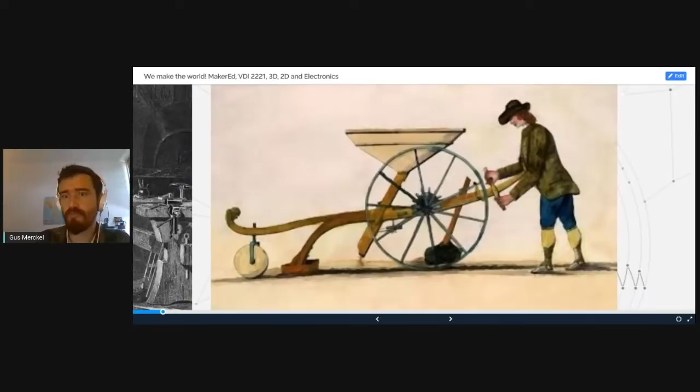This revolutionized the way we used to do farming and created a second revolution, because now we had machines. Now we needed fewer people working in the farms. Then a lot of people were thinking about other stuff, and that led in the end to the industrial revolution. So it's important to see this connection. In the maker world, we see the development of science and technology not as a thing that goes alone. It always goes together with communication and social changes.

When people started going to the centralized factories, in this picture we see a factory in London, in England. When people started migrating to the cities, it wasn't only because we invented the steam machine, it was also because the way society looked was changing. Now, at this point in history, we have a new type of society where we have 99% of the people working in a factory and 1% of the people owning the machines.

So this model is still present. The only thing that changed is that now the machines are not in Europe. Can you write in the chat, where are all the machines today? Where is the industry centralized today? Where do you see the machines today? You can write it in the chat.

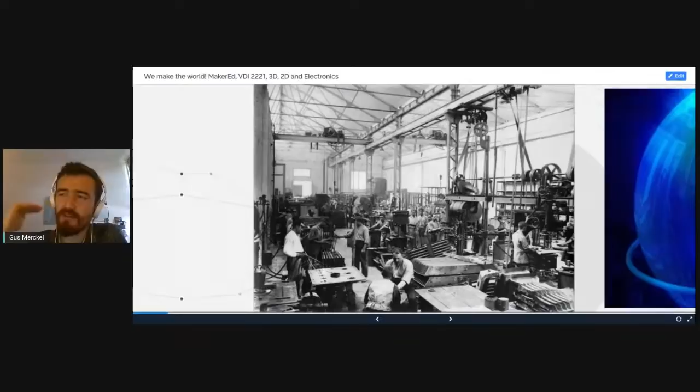Today, almost all the factories are in Asia, right? Taiwan, China especially, exactly. Yes, everywhere, but more centralized in Asia. So if you see, we've been living under the same social and industrial scheme for over 100 years. But 20 years ago, something happened. The internet came along. A lot of historians call the invention of the internet the second Gutenberg. What do they mean by the second Gutenberg?

Well, they mean that the process that Gutenberg started, going from a society without access to knowledge to a society that could get access through books, was happening again. Another democratization of knowledge. This particular aspect changed our life completely. Why? Well, it's easy. Now, you didn't have to wait. Let's say someone in Spain writes a book about chemistry. They have to print the book, put it on a ship or on a plane, and I have to wait. If I'm lucky, maybe 2 days, or if it's by ship, maybe some weeks. I have to wait 3 weeks till the books come.

It's possible that in that period of time, the discoveries written about in the chemistry book are outdated. Today, I write something here on my computer, I click enter, and the knowledge is available everywhere, or almost everywhere. So you see, there's a second democratization. Now the question is, if the first Gutenberg led to the agricultural revolution and the industrial revolution, what will happen with the internet?

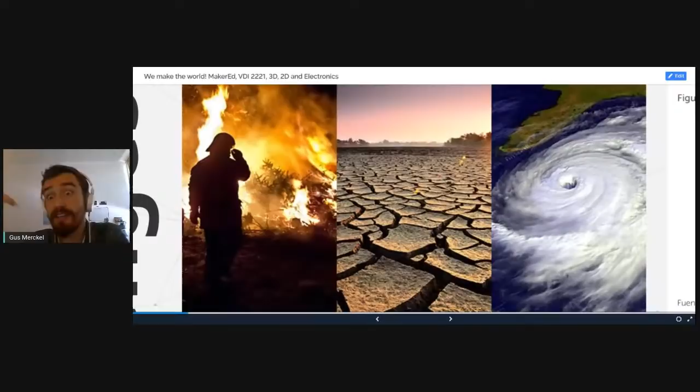For one, the environmental challenge. We are seeing climate change, and it's changing it all. We saw the fires in Australia a couple months ago. We are seeing the droughts in California, we're seeing more and more hurricanes of never before seen strength. So the problem of climate change is also a product of the way we've been managing industry consumption. So that's one of the big challenges we face.

We have also a very big challenge, and that's the low interest in STEM subjects in developing countries. Here we see the distribution in percent of people that study science in the year 2016 in Mexico. And you see that only 4.75% of the students are going to science. As you know, STEM stands for science, technology, engineering, and math. And we see every year that a lot of people decide another subject than choosing sciences.

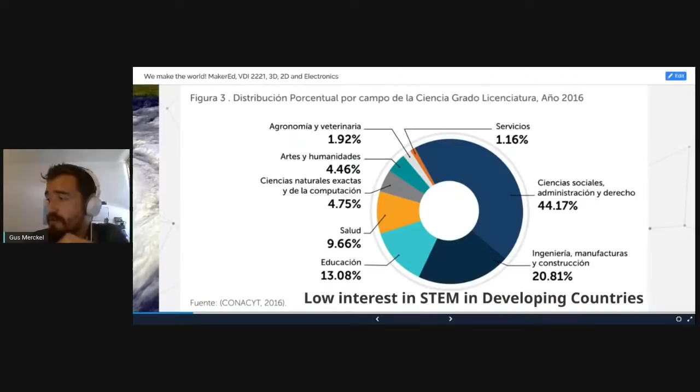I mean, in Mexico, we still have 20.81% of students choosing engineering, construction, and manufacturing. But again, 4.75% in science and computing is very low. And we need a lot of people choosing these subjects. Another problem is what I'm going to show you in this video. So please pay attention and tell me what you saw on that video.

I'm seeing some comments about the statistic. Yeah, you're right. It's not updated. We have to update it. I have more recent numbers, and they're still really low. I can give you the exact number. Write about why you think that a lot of people are not getting interested in STEM subjects. We can discuss that further.

So about the video that you just saw. So what are you seeing? Yeah, machines are replacing humans. Yes, that's one. In some cases, we can be replaced by robots. Yes, the machines substitute the people's work. This video is from Kurzgesagt. It's a really cool channel on YouTube. It's really interesting. What I like is this idea about fighting a job race against robots.

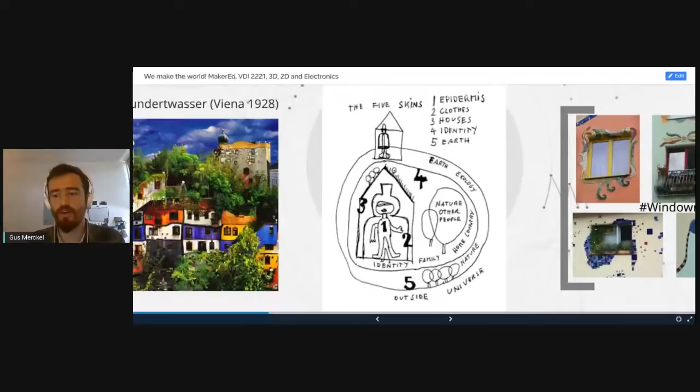And a little bit of what he's doing is this. One of his projects was called the window right, or the Fensterrecht. The idea: you've seen those Infonavits, right? You maybe live in one of those Infonavits. I live in a very tall building, and all the windows in this building look the same. So for Hundertwasser, we had the right to decorate our window, and he said every human being has the right to say a human lives here.

Sometimes technology is tricky. They're trying to optimize and make everything faster, but in that process, we also lose our identity. So creativity and identity are two key parts that I see to fight against the robots and also to work in this new reality.

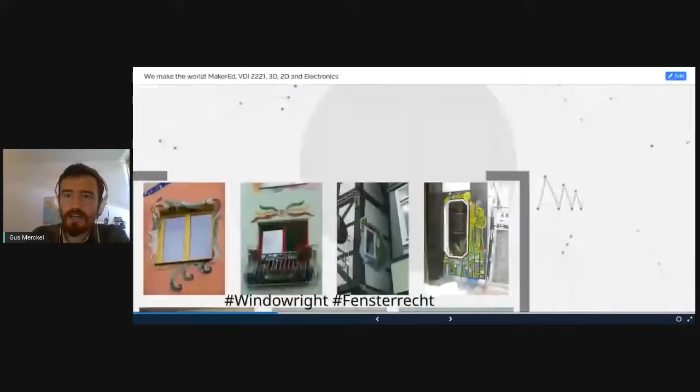So now we're gonna go to the topic of today, and I'm gonna show you what I call design thinking. But before, let me show you a video. You can write in the comments what you see in the video.

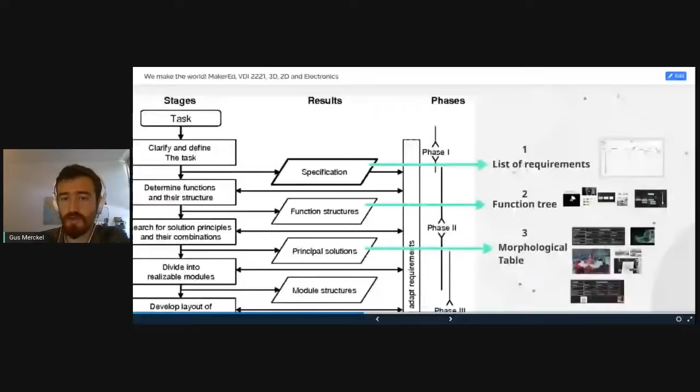Okay. So this part is very, very important. That list is going to be with us all the time. Okay. Yep. Okay. So we are going to have our list of requirements. Now we're going to go to the second part, the function tree.

And now, whoops. Now I'm going to give you a minute to draw a bike out of your memory. Please don't look at your phone, don't look on the computer. I'm going to give you a minute on a piece of paper to draw a bike. You have 1 minute starting now. Draw a bike. 60 seconds. Draw a bike. You have 47 seconds.

47 seconds. 35 seconds. Remember, it doesn't have to be beautiful. I'm not gonna judge you. I'm not gonna even see your bikes, so it doesn't matter. Yeah, no, I was riding my bike like 40 minutes ago, so yeah, I have it in my mind. But just draw your bike. If you're ready, it's fine. I'm gonna give you 10 more seconds. 8, 7, 6, 5, 4, 3, 2, 1. Done. Okay, so

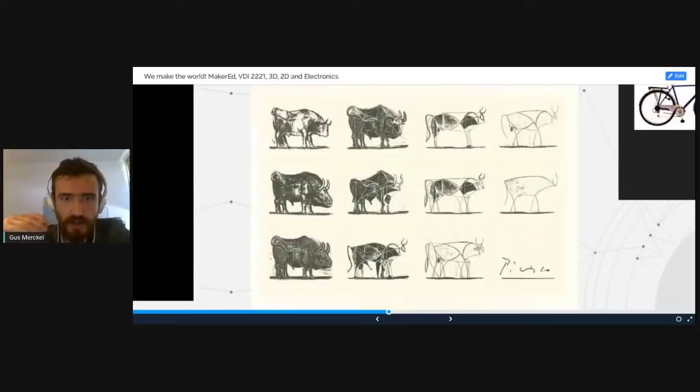Picasso, coming from the arts, does the same. In these engravings of the bull, the first picture is a very precise bull, even with shadows. This bull has muscles, has eyes, you can even see hairs. But then he starts abstracting. On the third picture, you see geometrical forms. On the sixth picture it's only shapes.

And on the last picture, he's reducing the bull to a small dot for the head, a U for the horns, two U's for the legs, and a small line for the tail. So that process has been done in literature, in art, and we also use abstraction here. For example, here we're gonna abstract a bike. So

everybody had several points in common. You had a lot of difficulties, and everybody drew a different bike, but everybody drew two wheels, right? Everybody drew a handlebar, I hope. Everybody drew a frame, un cuadro, I hope also. But you can abstract a bike to these main points. In engineering, we're gonna abstract to functions.

So for example, A would be the steering function. With A, we say left or right. With B, that's the seat, to carry whoever is riding the bike. D is the function of generating, of pedaling: you take human power, pedal power, and you create mechanical motion. And C is translating the circular mechanical motion into linear motion. But all the bikes have the same.

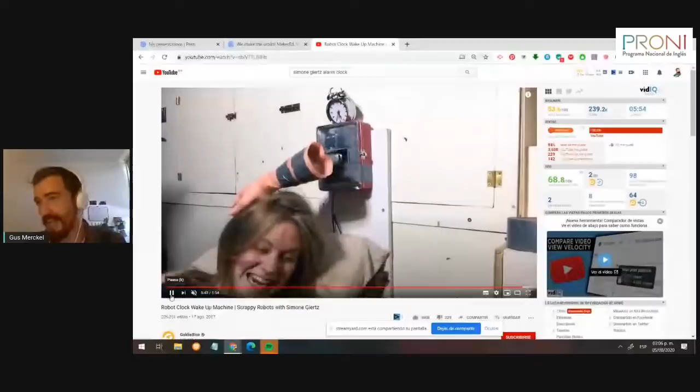So she created an alarm clock that uses a plastic hand, and when the time comes to wake up, it smashes her in the face. So I mean, if it's not in your requirement that it shouldn't harm you, I guess it's a feasible product.

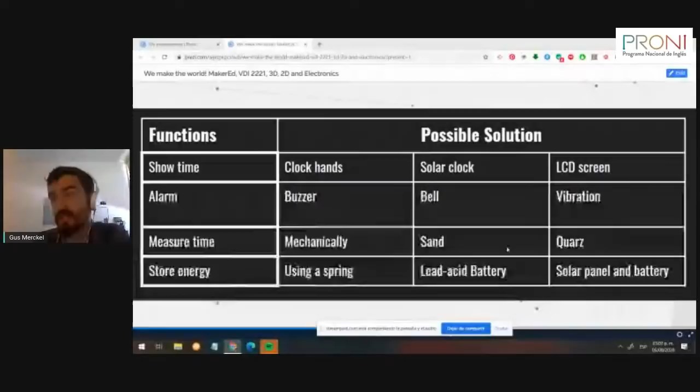Okay, the third sub function was how it's measuring time, and it can measure time mechanically. You remember with springs that you have to darle cuerda. No, you give it a twist, and then you have more energy stored. With sand, you can use a sand watch, right? Like in the board games, you flip it and it's counting time. You can use a quartz, an electronic way, and then energy, as I said, with a spring, with a battery, or a solar panel.

Okay, so what's happening now is why it's important to specify these sub functions. Before the video, I'm going to show you what you do now as a developer. What I have to do now is to decide, am I using manecillas or clock hands? Am I using a solar? So I have to connect all the dots.

Luckily for us, now there is a field of engineering and design called generative design. And it's fascinating because now I have my list of requirements and my function, and a computer designs for you how the product should look, fulfilling those requirements. Okay, so I'm going to show you this video and we can comment it afterwards. Whoops. Sorry, I went up. It's here.

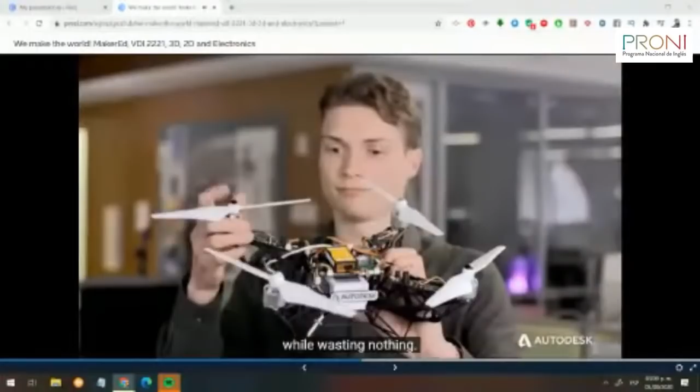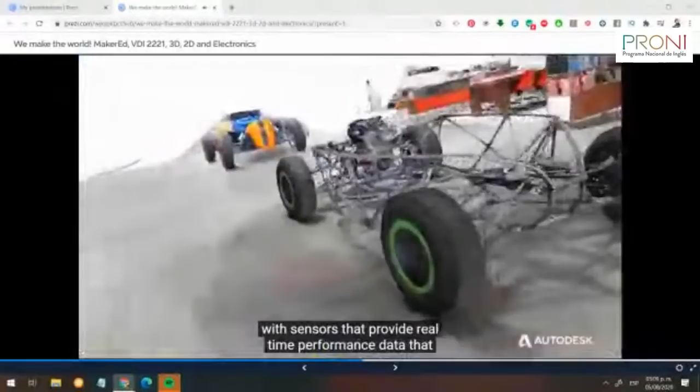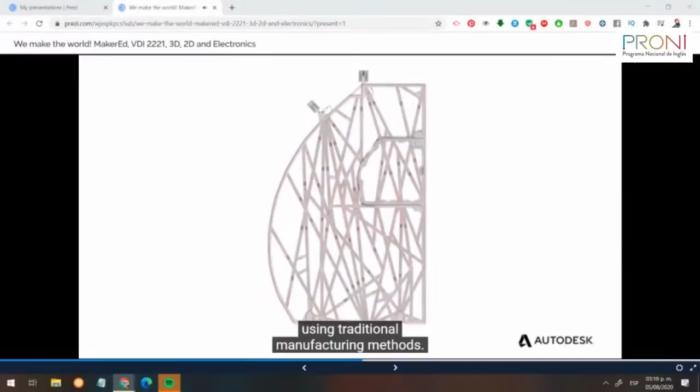What if you could come up with thousands of options for a single design without drawing, all of which meet specific goals set by the designer? And from those options, pick the one design that delivers on the most important criteria, the design you couldn't possibly have imagined. This is generative design, a technology that harnesses massive computing power, creating forms with precise amounts of material only where needed, achieving maximum performance while wasting nothing. But generative design can be about much more than simply turning out alternatives. Prototypes can be scanned and equipped with sensors that provide real-time performance data that can be looped back into the design process, so the object, in effect, co-designs itself. And depending on the material and method of manufacture chosen, the software can optimize the design for those choices. In its search for the optimal design, generative design creates complex forms that would otherwise be impossible to make using traditional manufacturing methods. Now, with advancements in material science and the ability of 3D printers to print metal, companies like Airbus can create forms like this airplane partition.

So this is very exciting. Sometimes for me it's still a little bit hard to explain what generative design is, because it looks like, I don't know, it's computer generated. But again, if I'm able to define my functions and my sub functions and the requirements, I can let the computer give me options, and that's mind blowing.

For example, this coffee cup, right? I have a coffee cup, and the requirement is it needs to hold 500 milliliters of water or coffee, it has to be made out of aluminum, and has a maximum volume of, I don't know, 10 by 10 by 10. Well, the computer is going to generate those shapes because, for example, one of the parameters could be reduce or optimize material use. So this is a field that if you teach your students how to abstract their solutions, they're going to be able to put it into a computer and do great things like Airbus and all these companies are doing. I like that a lot.

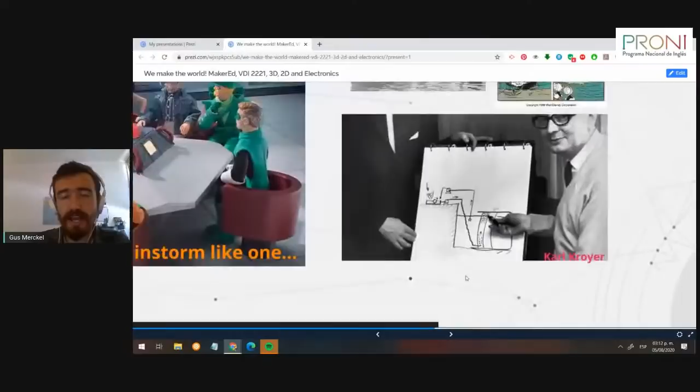I know it sounds crazy, but the idea is to start a process of creativity. Thinking like a superhero helps sometimes, and I'm going to show you an example. In 1964, a ship called the Al Kuwait stranded outside of the shore. So it stayed there. It had a lot of equipment and other stuff, and it started to sink. And it went to the bottom of the sea, and no one could take it out. No one knew how to pull it out, to take it to the surface.

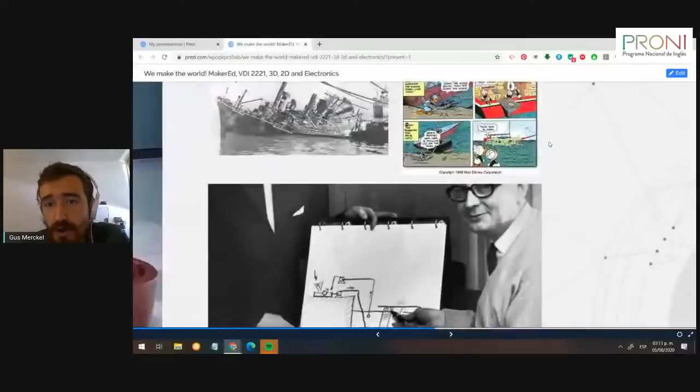And Karl Kroyer was a Danish engineer. He remembered that he read in one of the Pato Aventuras comic books one time, sorry, he read about an adventure where they rescue a ship from the bottom of the sea using ping pong balls, right? So they were squeezing the ping pong balls inside of the ship, and it came to the surface, and that's what he did.

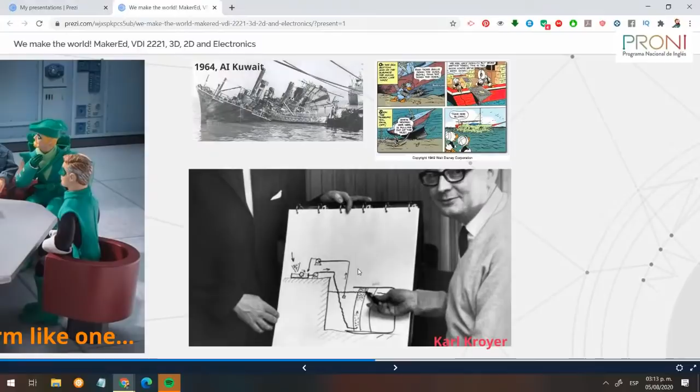He created a system, an engineering system using pumps and special balls, and he was able to rescue the ship. So again, superhero or comic solutions might sound crazy, but sometimes they're the right solution. What you're gonna do at the end on your morphological table is to, as I told you, connect the dots. In this case, I have two solutions.

First solution is I show time using clock hands. I give an alarm using a bell. I measure time using a mechanical system, and I store energy using a spring. Option one, and you see it down here. Option two, I use an LCD screen, a buzzer. I use quartz to measure time, and I'm gonna use a solar panel and a battery for the energy. So I have solution two. Okay.

And now we're gonna go to, for me, the interesting part, that is prototyping. I don't know if you have any questions. We still have around half an hour of this webinar, so if you have any questions, you can write them down.

Someone, Lydia, is asking, Gus, do you think there will be a time in which humans will be replaced by machines? Yes, it's called 5th of August 2020. It's happening. It's happening already. Yeah, it's happening already. And I don't know if you have another idea.

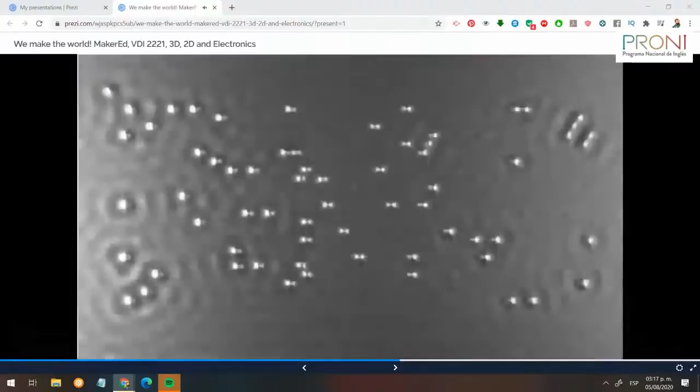So what you just saw is the smallest movie you've ever seen. It was made by atoms. Every dot that you see is a small atom, and it was made with an atomic microscope. So it's an animation done by moving atoms. And those are the tiny things everything is built around, right? So if you see skin or plastic, everything is made out of atoms. But we are now playing with atoms in a way that we didn't used to. And that's very interesting, and I'm going to show it to you with this beautiful image.

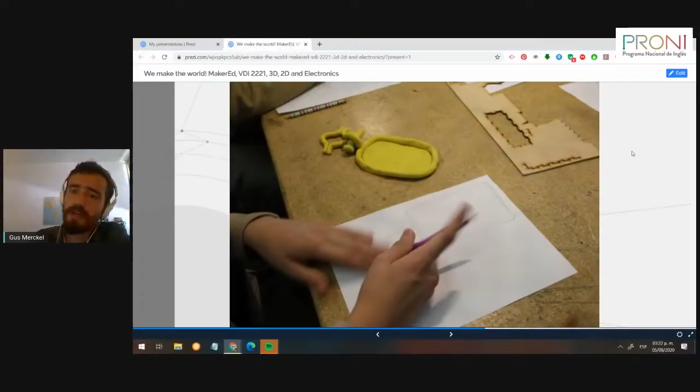Here what you see are secondary school students drawing a small cell phone holder for the bike. So they did that with plasticine here, with normal plastilina. Now they're drawing it. And you see different drawings. There you see the drawings done by the students. Then we go over here.

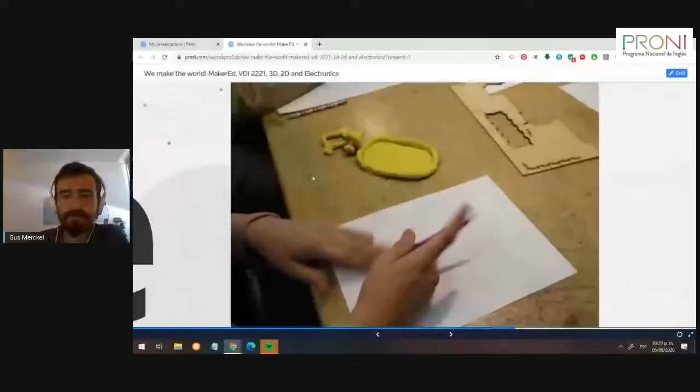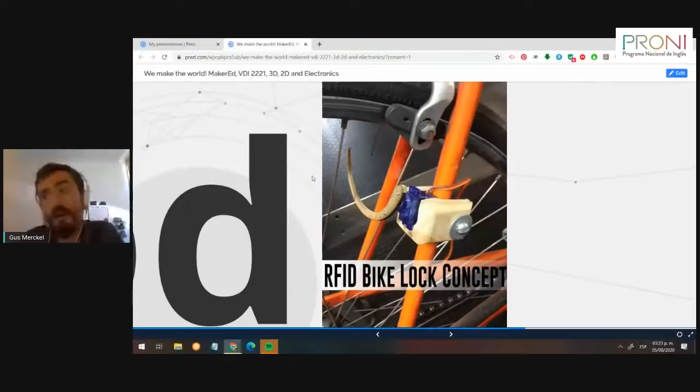Another idea was to use, for example, Lego. If you have Legos, you can use them to do your first prototype. As I told you, I like to use wood. So, for example, here what you see is like a bike lock, and what's carrying the motor, it's a piece of wood. So, if you like to work with wood, it's a perfect time to do a prototype.

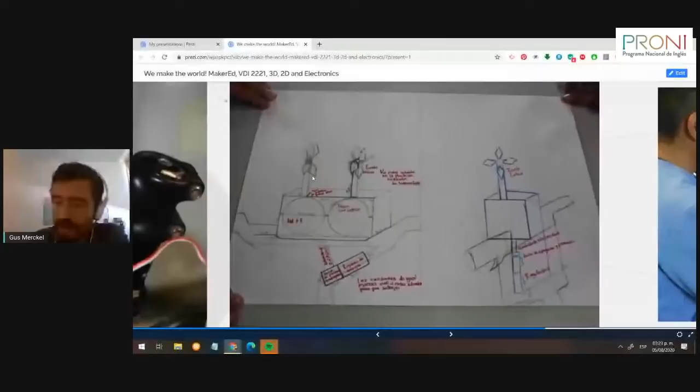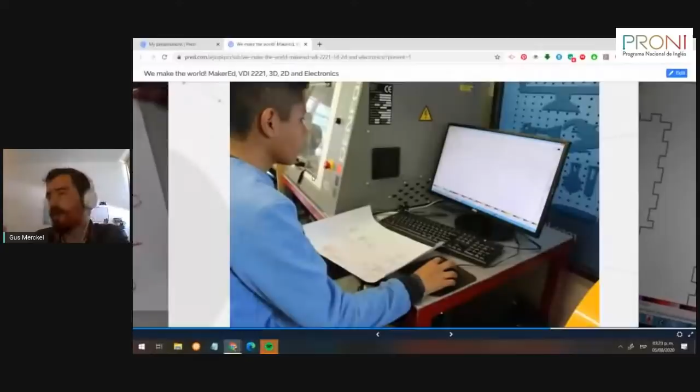Now we're gonna move over to the 2D design. That's when we start designing. So, for example, here the students developed a lamp. They draw it here, and they used a software called Inkscape. It's like Illustrator. So if someone has some knowledge in design, Inkscape is the open source version of Illustrator. So they draw on the computer. You see the drawing, and they went to a laser cutter and cut the pieces.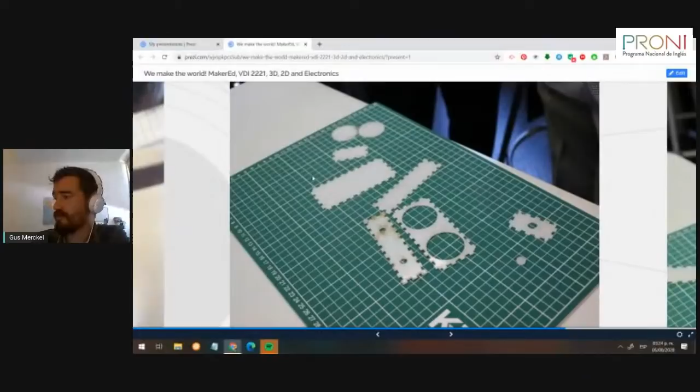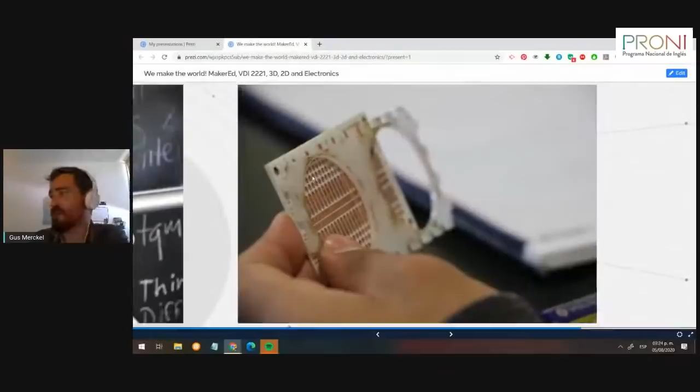You don't have to own a 3D printer or a laser cutter. You can go to your local makerspace, or you can build it with your hands. You can also build it by hand. So here you see them creating their prototype and soldering, right?

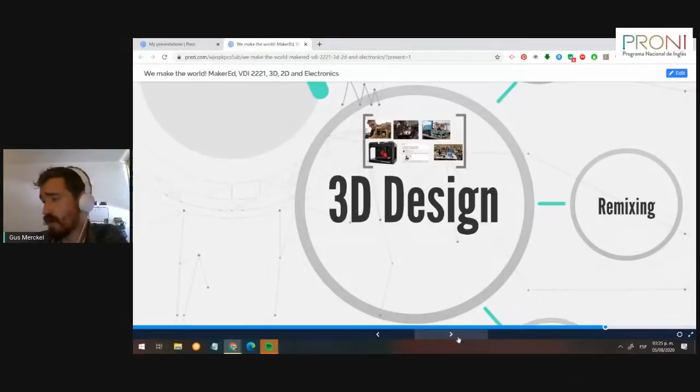Also, I recommend you to use Inkscape. It's very good for drawings and design. Here I'm gonna jump here, and now we're gonna go to 3D printing. And first of all, I'm gonna explain to you a little bit about the story of 3D printing. The 3D printers, the first ones we knew, of course, there were a lot of universities that had them in the 80s already, but 10 years ago they cost around 1,000,000 pesos at least. They were very, very expensive.

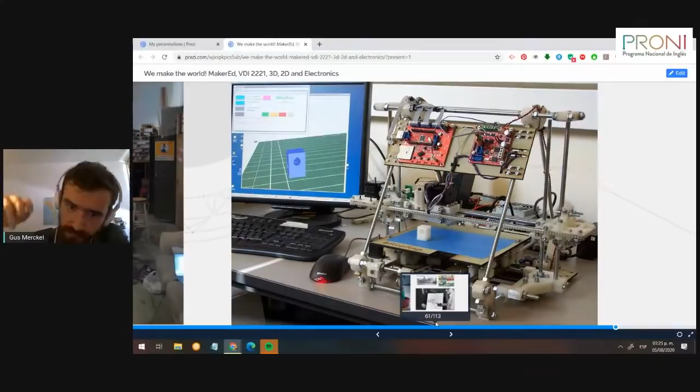But a professor started a project called RepRap, where he posted all the plans online on how a 3D printer should look. So you can download the plans, and if you had some knowledge in engineering and so on, you could build your printer. So a lot of people did that.

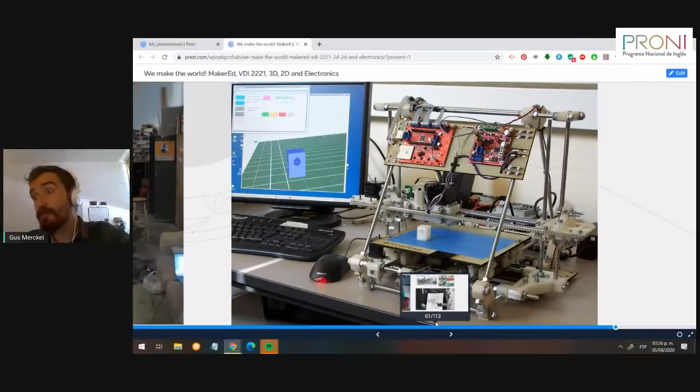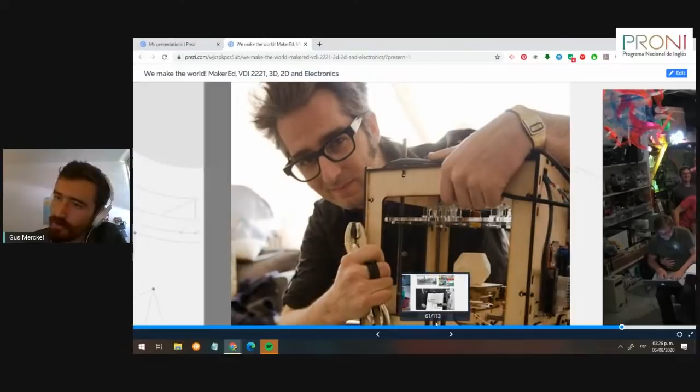One of the persons who did that was Bre Pettis, this guy you see on the screen. And what I like about this story is that it shows how we can solve problems but also create products. Bre Pettis started a company called MakerBot. He went to his local makerspace, a place called NYC Resistor, and created the printer you see on the screen. That printer was called the MakerBot. Give me a moment.

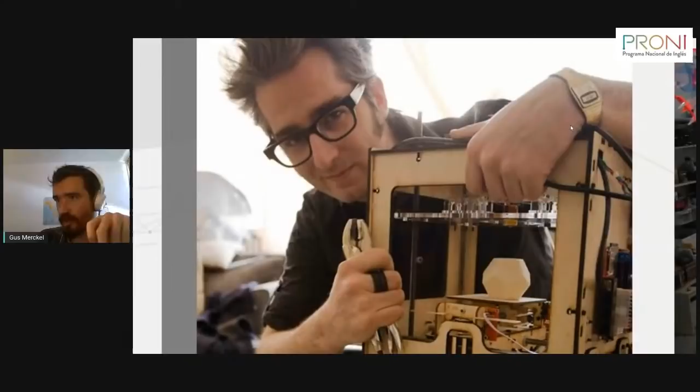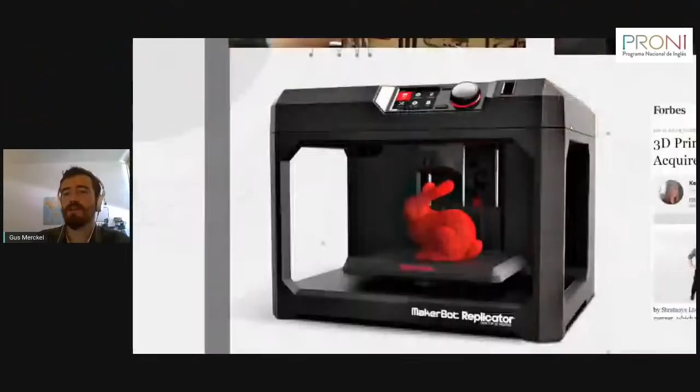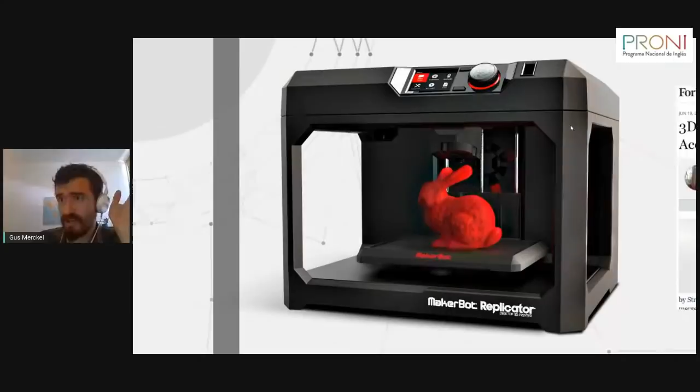So the MakerBot is a printer that, instead of looking like this, with cables and everything, was more user friendly. So he took the plans online and created a product. And it's funny because you have to think, he took something that was free on the internet and created a company around it. Well, in the end he developed the printer you're seeing here, MakerBot. This printer is now one of the most used printers in the world. And in 2013, he sold his company for $604 million.

So look, I always say I hope that one of my students gets to do something like this. I hope I could do that too, but I don't know. But it would be cool. He took something that was free on the internet, made it better, made a new idea about it, and sold it for $604 million. So you can see that there's something you can do with 3D printers.

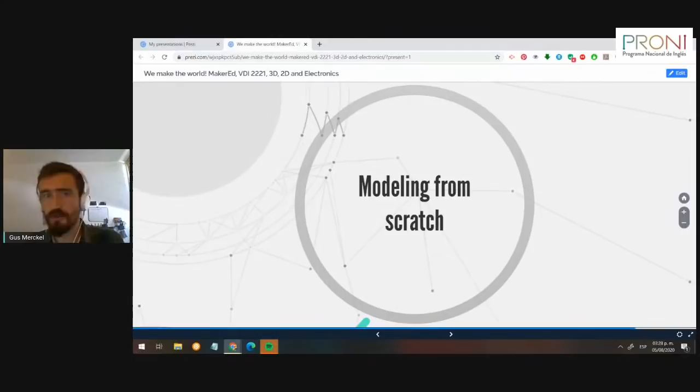So I'm going to show you how easy it is to 3D model. I'm going to actually show it to you. Let me just change my screen. For those of you who were asking if it's easy to start 3D modeling. Someone wrote, CAD software is very used in the automotive industry. CAD software is used everywhere today.

So the only thing you have to do is go to the website tinkercad.com, and you can create your own account. So you go to iniciar sesión con Google if you want, or Facebook, for example. And now you're going to be here, okay? So you're going to be in this table. So remember when you were a kid, playing with Lego or with wooden blocks. It works the same.

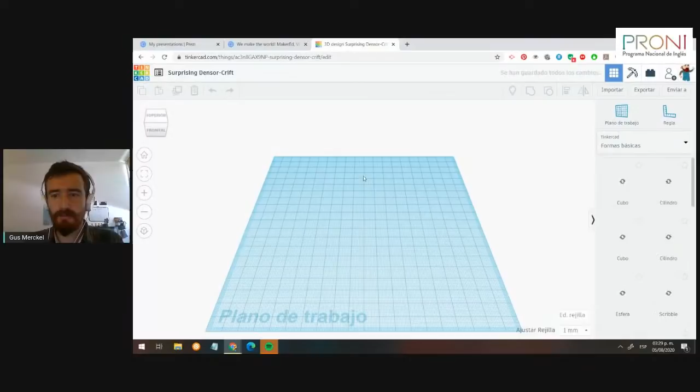I'm going to go to crear un diseño, and I'm going to start from zero. So I'm over here, and I'm going to drag. Let's say I want to build a house, okay? No problem. I'm going to take a cube, just put it here, and I can move it around. So now you see I have my cube. That's part of the house. So I always say that Tinkercad is the PowerPoint of 3D modeling. It works the same. Remember on PowerPoint, when you want to make pictures bigger or smaller, you click on the object, and then you just make it bigger or smaller, whatever you want.

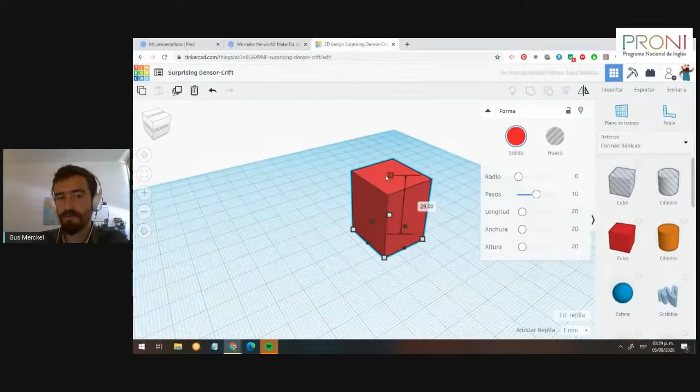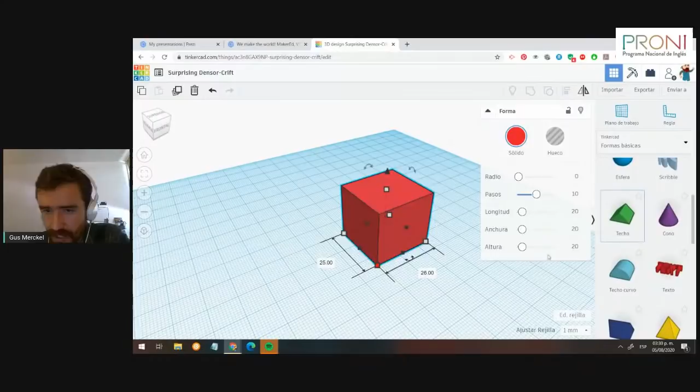Here, it is important to know that when I click the object, I see the measurements. This is important because CAD software has, how can I say it, the feature that always refers to a volume or something in the real world. So here, my cube is 25 millimeters wide, okay? So now I'm gonna take a roof, and I'm gonna put it here. Oops, sorry, I'm gonna put it here. I just move it around.

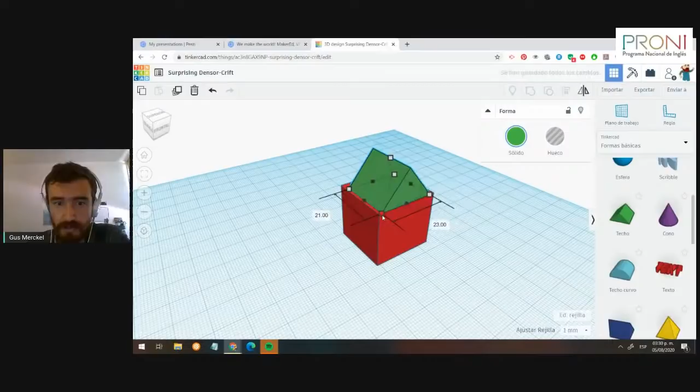You can apply that with your students, someone was asking. For example, I'm going to show you a project that we did about storytelling, where they had to write and design a mythological chimera, a mix of two mythological creatures, and create a story about it. So in the first part, they build the chimera using 3D software, Tinkercad, and then they write a story about it. So that's just one idea.

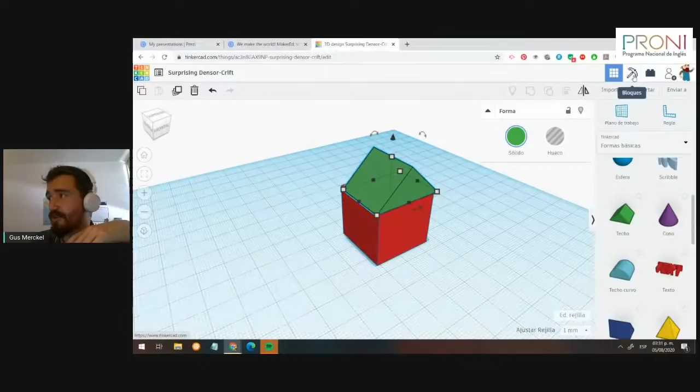Oh, someone said, "Lol, Minecraft." That's true. Yeah, it is. There's actually a way. If I go here to bloques, it takes me to the Minecraft world. So everything is in Minecraft. Or if I'm a Lego fan, I can do the house in bricks in Lego. I can be more accurate, but I can also do Lego. So I can model in Lego too.

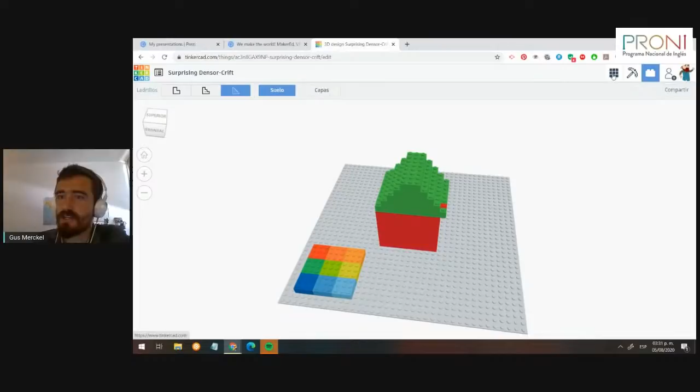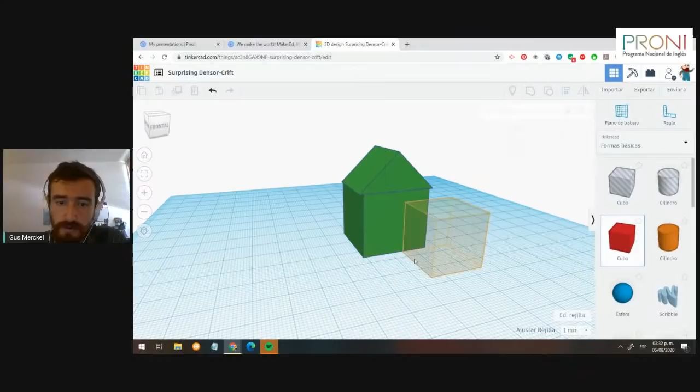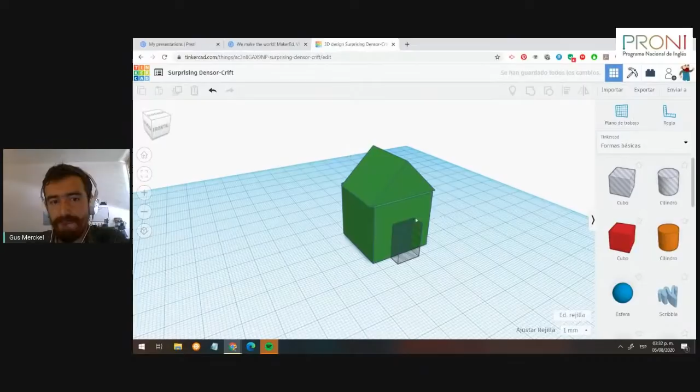Okay. So I'm gonna go back to Diseño 3D, right? And I can select both things, and I can merge them, right? So now I want to do a window. I'm just gonna take a cube. Let's say the door. So I'm gonna take this cube, and I'm gonna say, instead of solid, I wanna make it a hole. And now, oops, I can merge them. And I have a house.

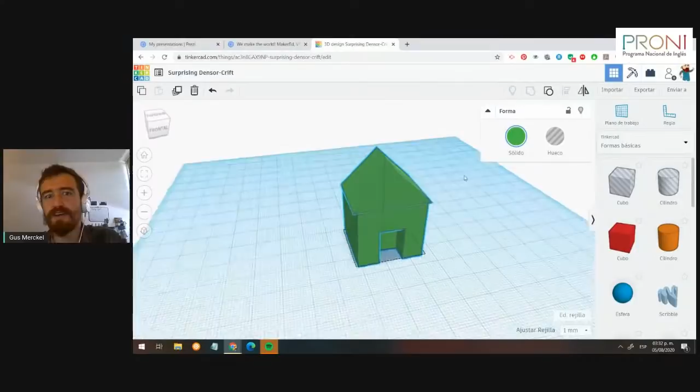Okay, so how can you use it, for example, in English? We haven't finished a publication called 3D English, but what we do is, for example, yeah, someone said, Hipólito said, my students enjoy Minecraft. Yeah, our students get this so quick because they're already building things in Minecraft. You can develop a lot for English using Minecraft, doing stories. I have a teacher colleague who does classes inside of Minecraft. He joins Minecraft and gives a task in English to his students.

And I was telling you about the 3D English publication. The idea of 3D English is, for example, to introduce colors by building a greenhouse, introduce shapes. You know, what's a triangle? What's a cube? What's a cylinder? All of those words. The storytelling part. And there's another thing that I think is very cool.

There are repositories. Remember that I was telling you that everything is now digital? What happened with the Beatles? Well, that's happening also with 3D models. I showed you how to start a model from scratch, from zero.

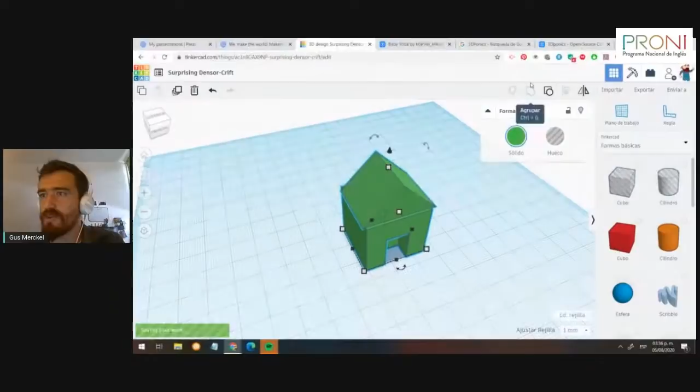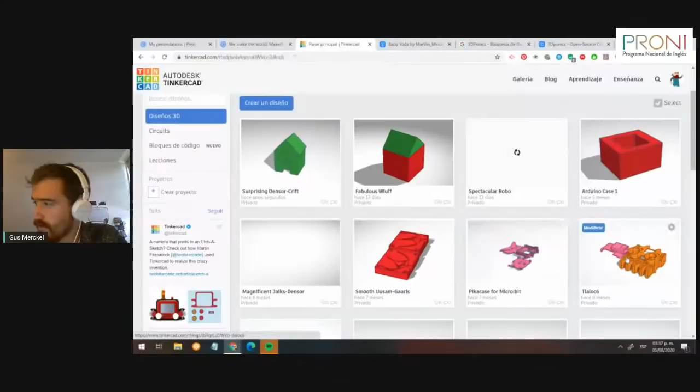What I was telling you about, I'm going to go back to my Tinkercad, about the storytelling with the creatures. I downloaded one of the models. The students have to download, let's say, this Yoda, and they also download another model, and they can merge them. Let me see an example. For example, this one. This one was made out of different parts, right? So this is also very easy, just looking for the objects.

I also forgot to tell you, another way that you can do this is very easy. You go to Thingiverse, education, and you can go to the subject. So let's say English. You go to Thingiverse and you go to languages, and you can download objects and also lesson plans for your class.

Someone was asking on the chat, what happens if you don't have computers? We've done it. We've worked, I told you, in Oaxaca, in Mixteca, in Los Altos, and it also works, of course. And I always say, it's funny. You would say the communities don't have electricity. Yeah, it's true. But I would say that 70% of all the students we work with, public school, in indigenous communities, have cell phones. And a lot of them are on Facebook already. So sometimes we also tend to exaggerate the situation of the communities.